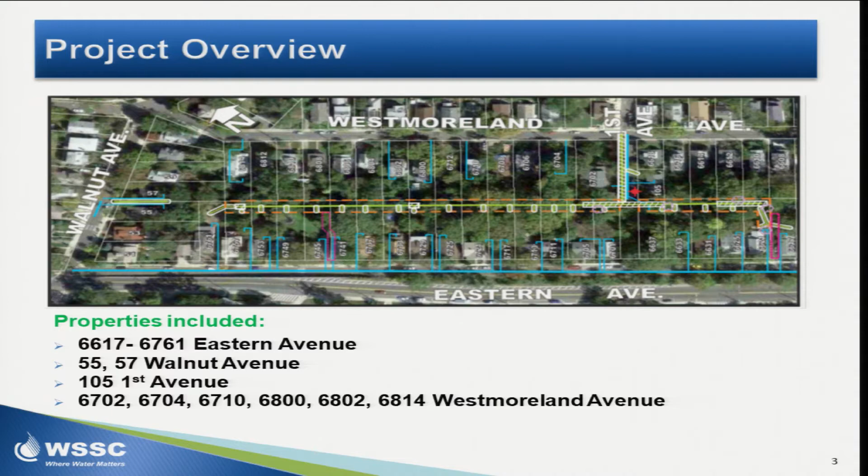Some of the factors that we have considered during the design development are expectations from residents and the community, concerns and questions received from Montgomery County Department of Environmental Protection, City of Takoma Park guidelines, and multiple site reviews involving Montgomery County Department of Environmental Protection, City of Takoma Park, and WSSC. These factors are very important for us moving forward in design, and we'll consider those until final design.

Residents can access project documents online at www.wsscwater.com/Eastern. Some of the available documents are the list of questions submitted to WSSC by Montgomery County Department of Environmental Protection, WSSC's response to those questions, the hydrology report, 30% design plans and documents, and previous meeting information. At this point, I would like to invite Mr. John Martin to go over the design options.

Okay, good evening, everybody. To start with, we'll start with the water main installation, or we're saying this is in the front yard. We have 30% design completed for the water main installation. It's about a quarter of a mile of 8-inch diameter new ductile iron pipe installed within the street right-of-way. That would be Little Eastern Avenue. And then 1.5-inch diameter copper service, just a small pipe installation from the street, Little Eastern Avenue, to the service lines in the backyard.

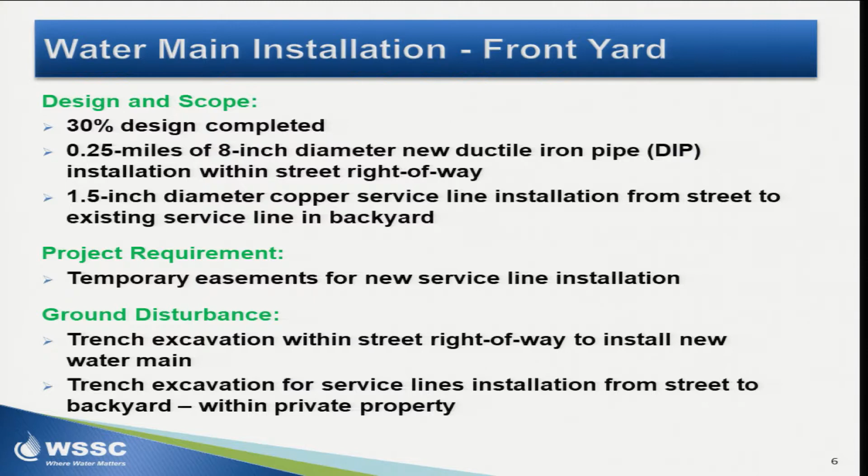Moving on to the sewer main installation, as Busan said, there's 2 solutions. Solution 1 is going to be a backyard. This design is also 30% complete. It consists of 0.19 miles of 8-inch diameter polyvinyl chloride pipe, better known as PVC, installed in the backyard. That'll be 8-inch diameter main, and then a 4-inch diameter service connection from the new pipe to the edge of the easement line. That will connect the existing service pipe to the new main. Also, new manholes and cleanouts will be installed. Cleanouts at each service connection, a few manholes throughout.

Project requirements for this is a 20-foot wide permanent easement for new main installation, and a 10-foot wide temporary easement for laterals in the backyard. It's across all the backyards so we can get the new main in. There'll also be some requirements for access paths to get to those work areas for putting in new main. For solution 1, the plan is to install it with horizontal directional drilling to reduce impacts to the community. I know a little bit about horizontal directional drilling. I brought Dave along, who knows a whole lot more, so he's going to talk about that a little bit. Thank you.

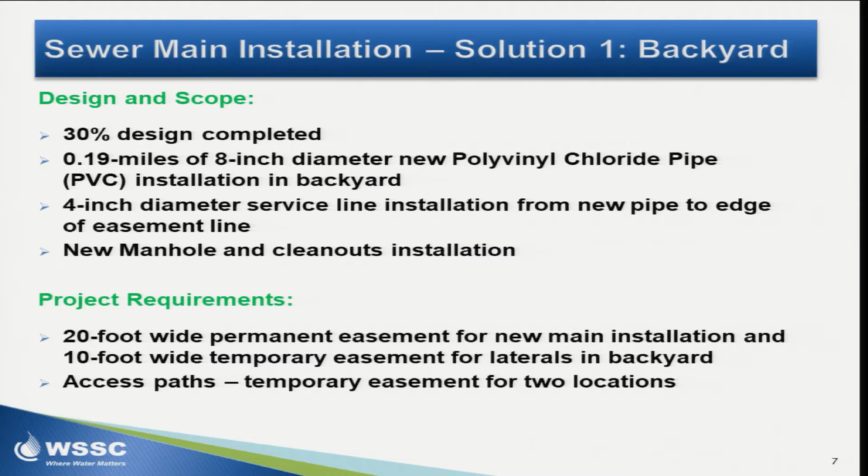So the horizontal directional drilling option, I don't know how familiar you are with that process, but it's referred to as a trenchless process. It's basically the guys you see on the side of the road drilling from Verizon, a similar process, but much more controlled and maybe a little bigger machine. So approximately 90% of the backyard sewer main, the main line, will be installed trenchlessly. We can't completely avoid digging, but we can reduce that down quite significantly.

From an access point of view, we're going to need access from 3 different locations. The main one will be First Avenue on the backside, but there will also need to be 2 other accesses, which I'll show you here in a moment. There will be 3 locations for drill entry and exit, and I'll explain a little bit more where they will be. There will be 4 sewer manholes, 1 at each end, 1 at First Avenue, and another intermediate one, which I'll show you where that will be located.

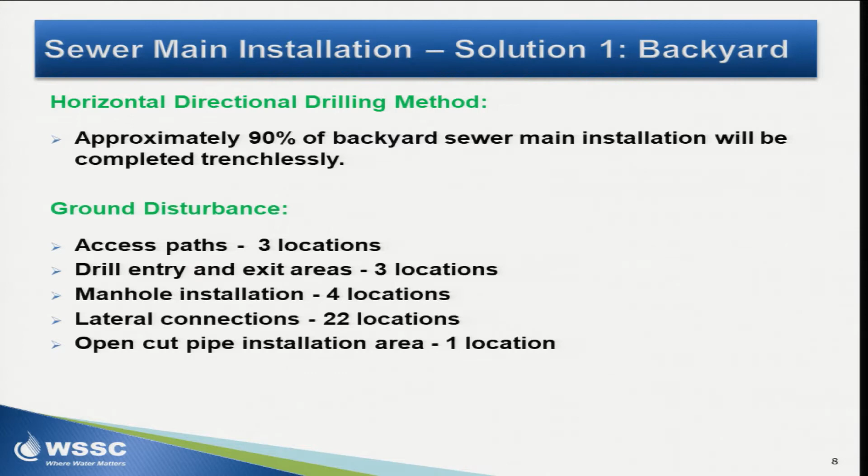And obviously, we're going to have to dig for each one of those lateral connections from your house to this new line. So every property will have an excavation to make that final connection. And we do have a small portion of open cut installation as well. So looking at the map, there's an access point we've selected here, and there's another access point located down on this end, as well as at First Avenue.

For our drilling operation, the drill rig will sit here at this end and drill in this direction towards First Avenue, and make the exit here. So there'll be an entry pit and an exit pit located here, and in that entry pit, for example, we actually will be installing the manhole in that location as well. So that will do double duty with only 1 excavation.

And then there'll be another entry pit at this end here for a shorter directional drill in this direction, all being tied together here. This is the low point in the sewer. And there's an open cut portion located here. Each one of these locations here are the approximate locations of the sewer laterals that will have to be dug for each one of the homes.

Don't have anything else at this point in time. Would you like to jump on the next phase? Sounds good. Thank

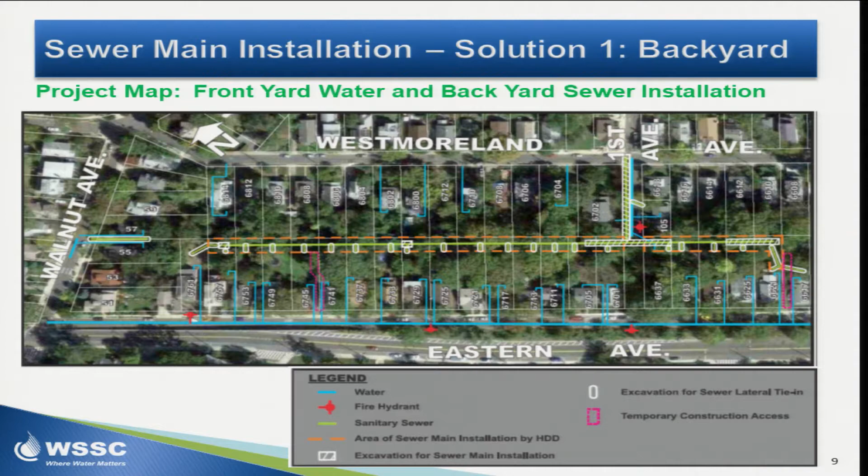you. All right, and then moving on to solution 2. Sewer main installation solution 2, front yard. This design is also 30% complete. This is 0.22 miles of 2-inch diameter pressure sewer installation within the street right-of-way. That again is Little Eastern, 2-inch diameter pressure sewer.

And then 1.25-inch diameter pressure lateral installations from the street, Little Eastern, around to the backyard where the existing sewer laterals leave the house. A few manholes would be installed in the street with this solution. The solution would include grinder pumps in the backyard to pump the sewage up from the lateral in the backyard up to the street, up to Little Eastern.

A few requirements for those grinder pumps: the installation of a dedicated breaker in the electrical panel inside of each home to power the grinder pump. Installation of electrical conduit from the electrical panel in the home to the backyard. That'll take the electric from the panel to the grinder pump. And then installation of necessary electrical accessories for the grinder pump. That's primarily a shutoff switch in the back, which can be viewed from wherever the grinder pump is.

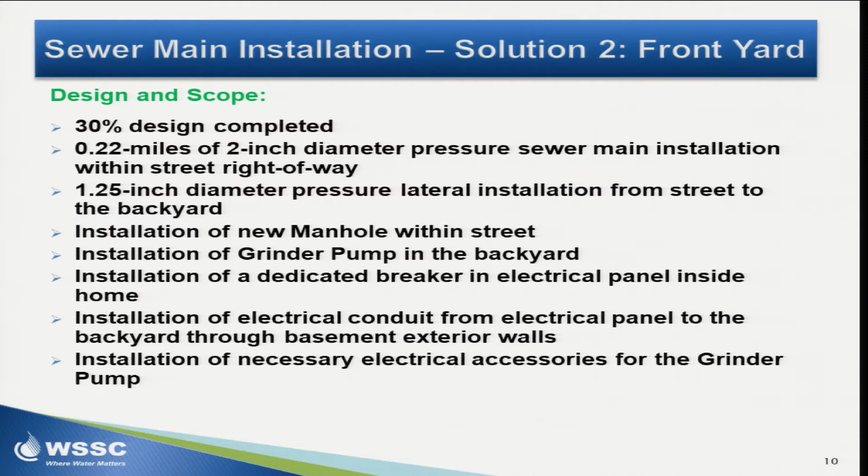Ground disturbances with this solution: trench excavation within street right-of-way to install the new sewer main. That's the trench in Little Eastern. Trench excavation for service lines installed from the street to the backyard that's within the private property. And then a pit excavation for the grinder pump installation. The pit's maybe 8 feet in diameter or so, would be over top of the existing sewer lateral. So wherever that lateral is kind of determines where the pit would be for the grinder pump.

Project requirements: temporary easement from street to backyard for lateral and grinder pump installation. Right of entries to access into the home for the electrical inspection and installation of necessary electrical accessories. And electrical inspection of each property. Would also require available space in each electrical panel to add a new breaker for the grinder pump. And this would all require approximately 6 months of additional time to complete the design, going through all those right of entries, inspections, figuring out what electrical service is available and what we need.

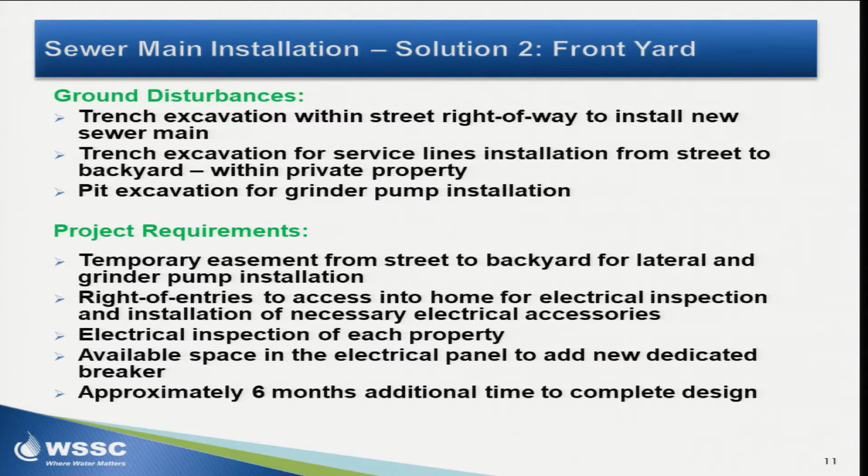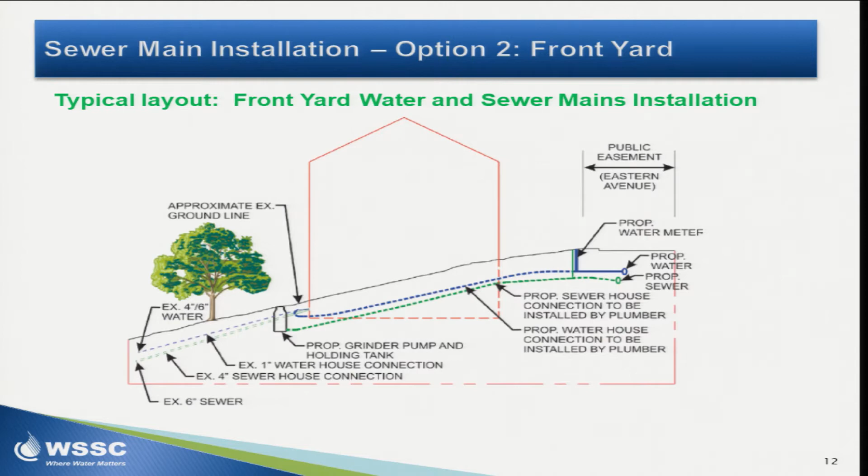So we'll move on to the tree impacts and mitigation. We're of course at 30% design, so we've got a ways to go yet to have a final design. The front yard water and backyard sewer option, which is solution 1, the construction activities that impact the trees would be the installation of water service lines from the street to the backyard, also the installation of the sewer laterals and installation of backyard sewer main using horizontal directional drill.

We're estimating at 30% design approximately 12 trees have been identified to be removed. I'd like to note that this is a 50% decrease from the previous open cut method, where we would dig a trench for the sewer main in the backyard rather than using horizontal directional drill. So that was for solution 1.

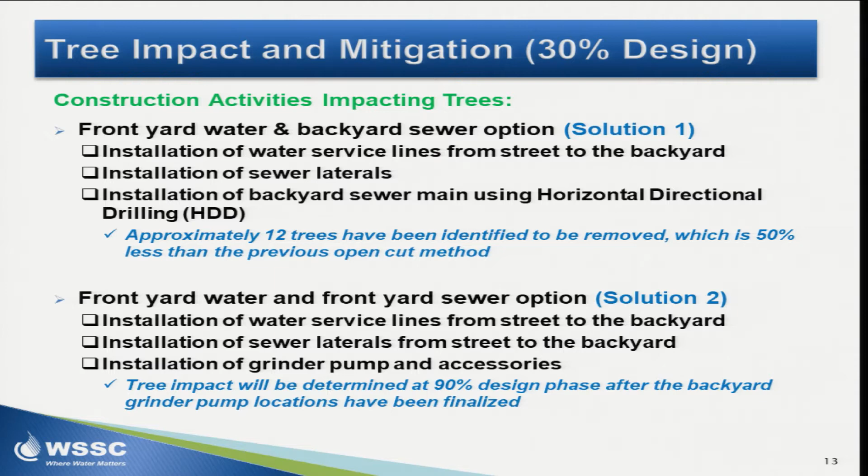For solution 2, the construction activities that would impact trees would be installation of water service lines from the street to the backyard, same as solution 1, and also installation of sewer laterals from the street to the backyard, and the installation of the grinder pump, which would be an 8-foot diameter pit that we'd have to dig to put the grinder pump in. Tree impacts for this solution will have to be determined at the 90% design phase after the backyard grinder pump location has been finalized. So that is ongoing, or will be ongoing. Tree impact and mitigation.

Trying to protect the trees as much as possible with tree trunk protection installed as needed. The trees will be fenced as needed. The mains and laterals will be installed trenchlessly at every possible location. And we'll also use some Alturnamat, which we will install for the root protection as needed.

Alturnamat is basically kind of a large mat that you lay down around the tree so that when the construction equipment drives near the tree, it's not hurting the roots of the trees. Try to protect them as much as possible.

Tree replanting: there will be the selection of appropriate species and planting locations. Every removed tree will be replaced with at least 2 new trees, and the new trees will be planted under WSSC's forester's inspection. It's Doug here or some others at WSSC.

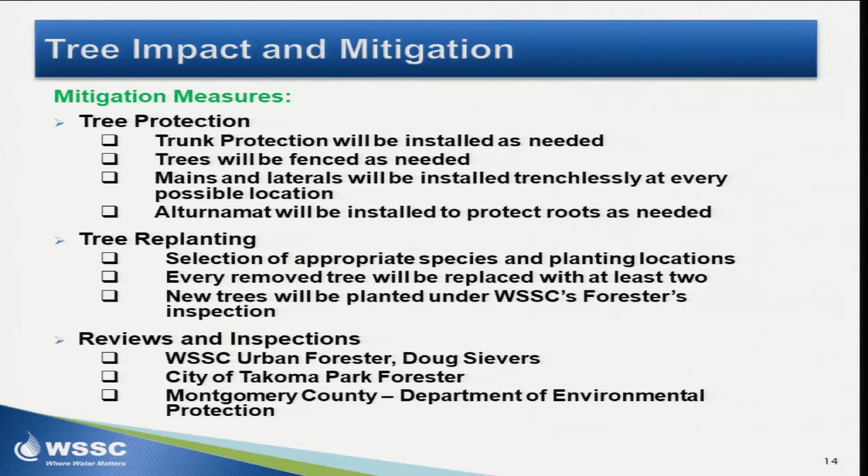Reviews and inspections will be by the WSSC urban forester, Doug, the City of Takoma Park Forester, and also the Montgomery County Department of Environmental Protection. They can also review and inspect. And then here's some tree protection measures. Tree trunk protection.

Shows some boards strapped to the trees so that the construction equipment, if it accidentally does hit a tree, it doesn't damage the tree. The middle picture there is the Alturnamat, showing they're protecting grass, can also protect the tree roots and other vegetation. And then tree fencing, just to say, you know, here's a tree, be careful, I want to save this tree.

So with that, that wraps up the kind of technical design aspects of this. Claudia's going to talk a bit next.

Good afternoon, or really good evening. My name is Claudia Koenig. I'm an Associate Counsel 2. I'm an attorney for the Washington Suburban Sanitary Commission, and you will be selecting option 1 or option 2.

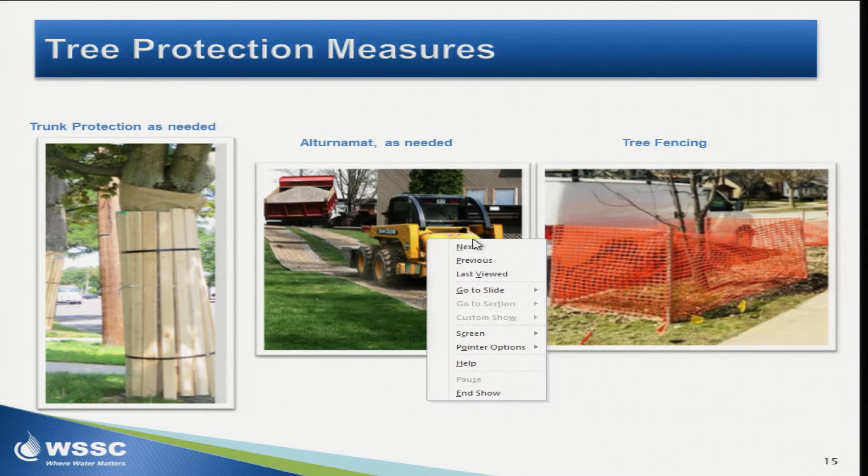How do I change this thing? Next. There.

You have heard about solution number 1, which is the solution involving the 20-foot wide easement that's going to be going across your backyard. That is an easement to WSSC for the purposes of installation, inspection, maintenance, operation of our sewer main.

We will also need a temporary easement or a temporary construction easement that's going to be 10 foot wide so that we can connect our sewer main to a lateral. So that's the first solution.

The solution number 2 is the grinder pump solution, and that involves a temporary easement so that we can come onto your property and put in the grinder pump and the connection to the sewer main that's going to be in the street. Those are your 2 options.

You can pick up the voting document tonight, or if you don't want to pick it up, we're going to mail it out to those persons who are not here by the end of this week. So by Friday, they will be in the mail. You will have approximately 2 weeks to respond, to vote, and you can either email them to me, and my email is on the voting document, or you can mail them back to me.

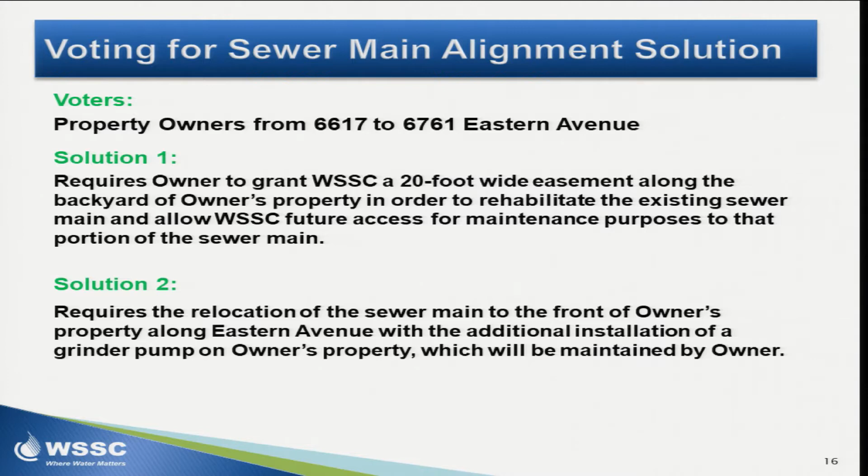God. You need to have unanimous voting for solution number 2. So solution number 1 does not require unanimity, but number 2 does. And the reason being, as I'm sure you have been told previously, is because we cannot zigzag the sewer main in and out of properties, to the front, to the back, to the front, to the back, like a zipper. It needs to be perfectly straight for it to work properly.

So at the end of this presentation, you can either vote tonight and hand me the document, or you can wait till you receive it in the mail, or you can take one home with you, think about it, look through it, and then respond. Thank you.

At this point, we're ready for questions and answers. So we're gonna go up there, right? So everyone will sit together and answer questions.

Can we take this up there? Can we take this up? Oh, that's over there. Okay.